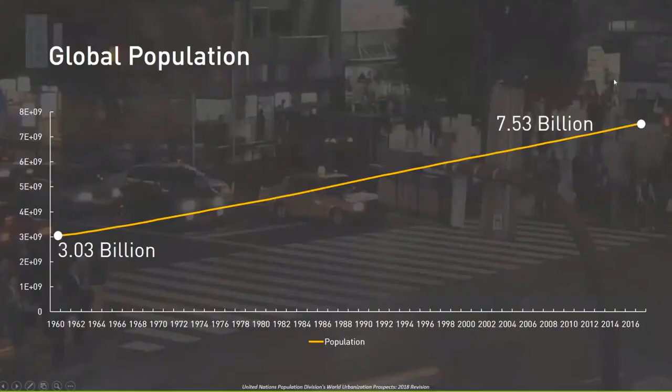Okay, so as we all know, there has been a drastic increase of population since the 1960s, right? So from 3 billion people to more than 7.5 billion people. So what looks like here a linear increase is actually very exponential when you go further back in time. So over the last 57 years, the global population has grown by 4.5 billion people.

To put this in perspective, I chose Shanghai as an example. Every year, the world is growing by approximately 86 million people per year, and the largest, Shanghai, has a population of 24.3 million. So this means approximately 3.5 times the largest city of Shanghai is growing per year in terms of inhabitants over the world. And of course, Shanghai is a very, very large city. If I did this talk in Europe again, it was, I think, 5 times the Netherlands. So if you compare it to countries, it's even more impressive than comparing to a city. But as I'm participating here now in your workshop, I thought Shanghai would be a nice example.

So in the early 2000s, there was more urban population than rural population... actually, in 2007, the urban population surpassed the rural population. So what does that mean? In developed countries, over 90% of the population lives in cities. And this, of course, has some sort of effect on cities, but how exactly? One good example, or very prominent example, is the urban sprawl of Phoenix, in Arizona, in the United States of America.

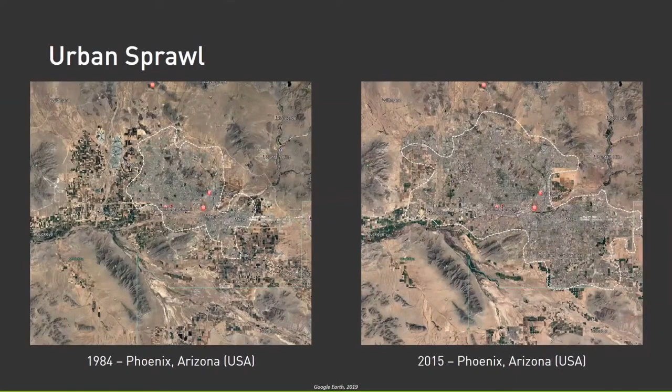So the boundary of the city has grown over the last 30 years by a huge amount, as you can see in the white dotted line. This means more area is needed, and the city becomes even denser.

This also means there's a clash of different social classes with different housing standards, so you as architects and engineers have to accommodate for that and address these social differences.

According to the United Nations Global Status Report, one major challenge will be to provide building floor area in the construction industry. This means basically we have to build more floor area.

This existing building floor area needs to almost double in the next 30 years. Before that, we thought we'd go again through the project briefing for new buildings, where the floor area is not only limited to Asia and Africa, but also Europe and North America, which we would like to guide you through until Friday.

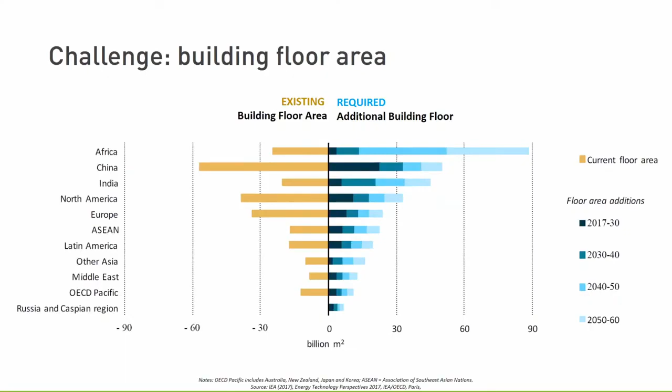This translates to an area of 255 by 255 meters, or 9 soccer fields. But before that, I guess we can go through a bit of the current challenge in general.

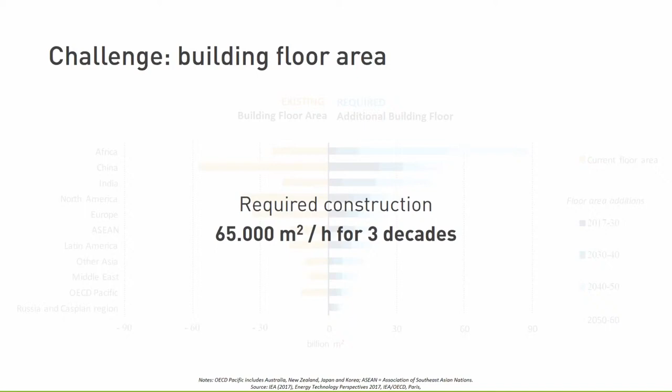Maybe a bit of a repetition of what we already discussed, but I think it's really important to get that building floor area, and also to other certain consequences.

We as the building industry consume a fair share of the global energy. The building and construction sector consumes more than 35% of global final energy. From an ecological perspective, this energy consumption also means more CO2 emissions.

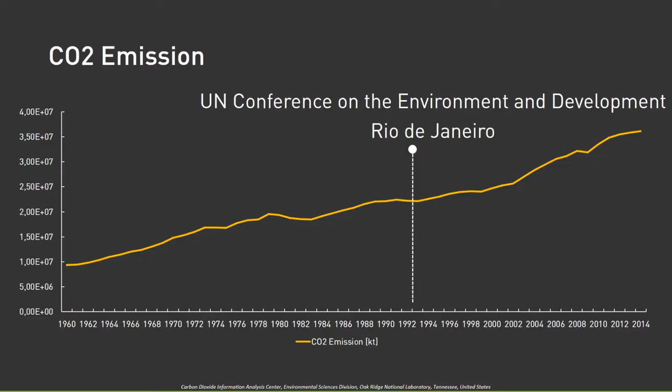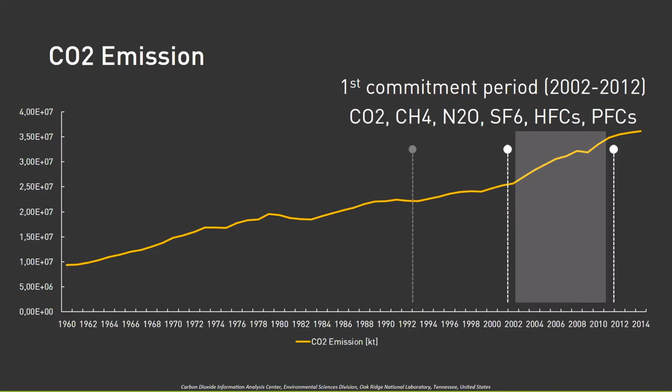The problem or challenge that we address in this workshop is the limitations of timber construction at the current moment. This is not to say that current developments in timber construction aren't super exciting, it becomes quite obvious they are very much advanced.

I think we saw in the last couple of presentations, and you're going to see even more in the upcoming presentations, that timber construction can easily be called one of the most digitally advanced construction sectors. But there's still a lot of things to tackle.

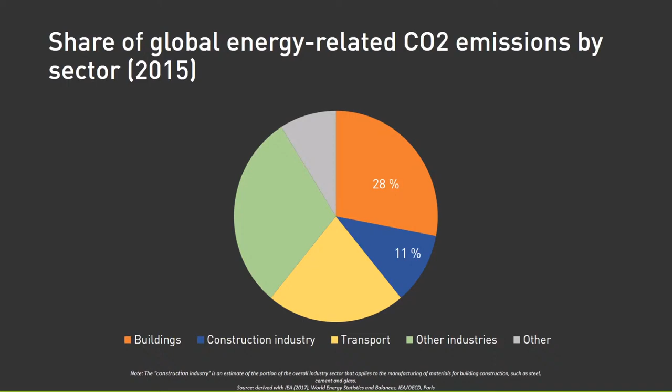One of the challenges, within the 40% of energy-related CO2 that we identified, is the limitations of the structural column to slab systems, which is mostly limited to very clear spans or short spans, and not really performative or materially efficient.

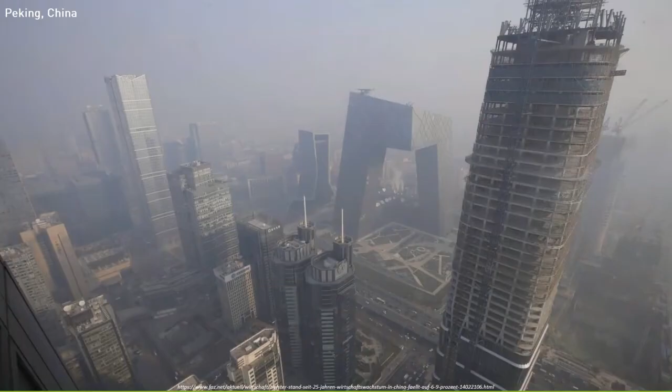So what could we do with that? We set the goal of this workshop to build more with less, through collective exploration of less energy consumption with all of you guys. But how is it possible?

We want to find new spatial, structural, and topological potentials within timber construction. Our hypothesis is that if you bring an on-site mobile robotic fabricator into the game, we can achieve multi-directional and monolithic timber slabs. The real question we try to answer is: how can these slabs look like?

And what can be achieved with timber construction given that technology. I guess we as workshop leaders have a couple of ideas about this, but it's way more exciting to get a lot of opinions and ideas into the playing ground, right? So I think this is the summary of what we're trying to achieve with you, and I hope this is also interesting for those of you in practice to see where timber construction could go in the next years. What is maybe already almost possible, and also staying on the edge of the field.

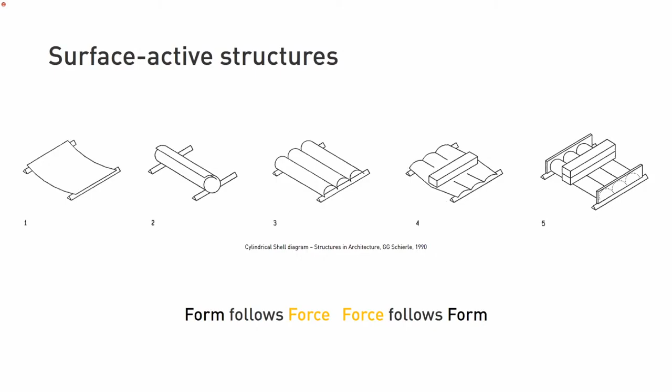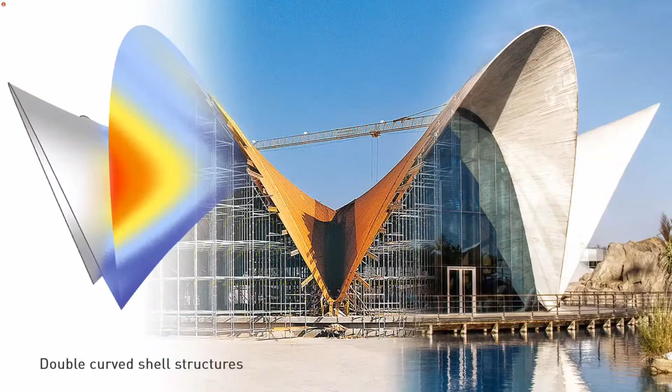Mostly in architecture, curved shells have been a powerful way to focus on tectonic articulation. This is similar to what we did on Saturday, but with the aspiration of making it more advanced in terms of really defining the position and arrangement of all the beams so that they make sense.

A variety of alternative strategies have been developed and are feasible to produce these double curved structures, using linear elements. You can discuss the aesthetic qualities or the structural qualities and so forth of the grid shell.

Then, by using planar elements, you have the area of fabrication, which you can see in the middle and on the right, where we already introduced you to the mobile fabrication agent. The one in the middle is the Exhibition Hall, which was done using that specific robot.

On Wednesday, if I'm not mistaken, we'll guide you through an integrative synthesis of approaches across all these areas, using discretization so that you can put everything together into one project integrating all these aspects, such as the Inside-Out Pavilion from 2019 by the team, and most notably the currently realized Swatch headquarters.

There are also other novel approaches to reduce extensive form work, with one example being the Nest HiLo from the Block Research Group in 2018. So multiple institutes and construction companies are trying to create surface-active structures with new methodologies and new approaches.

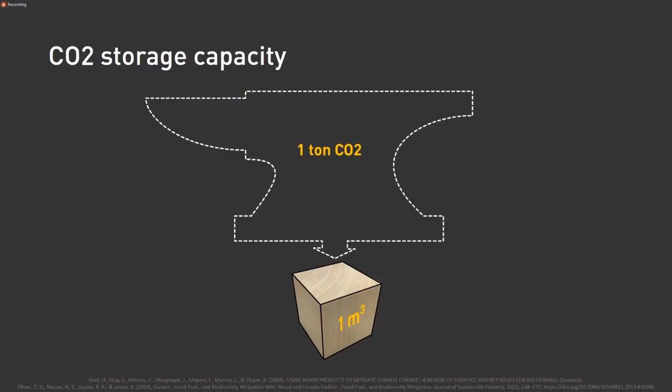Comparing to houses with the same level of energy efficiency, a wooden alternative causes approximately 40% less CO2 emissions, and the amount of atmospheric carbon stored in the timber can be up to 4 times as much as an alternative building material. This is one good reason why we're seeing more multi-story timber buildings emerging over the last few years.

I'm quite sure Jakob has shown this already, but I'll just briefly introduce some of them. These new multi-story timber buildings are reaching new heights.

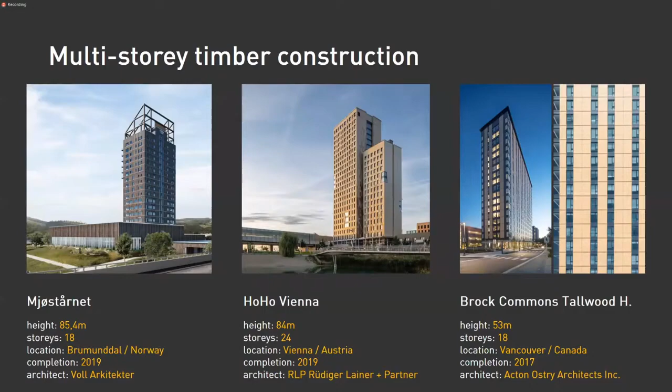For example, the Mjøstårnet in Norway, currently the tallest timber building in the world at 85.4 meters, though I hope this is still the current case—I'm not sure if there's already a higher multi-story building. This could only be the beginning, as further studies on multi-story timber construction aim for buildings up to 85 stories, reaching heights over 300 meters. There are already new projects in the pipeline trying to reach even larger heights. So there's a clear trend in timber construction to build higher, demonstrating how we have overcome many challenges facing timber architecture, while tackling the challenge of required building floor area over the next decades.

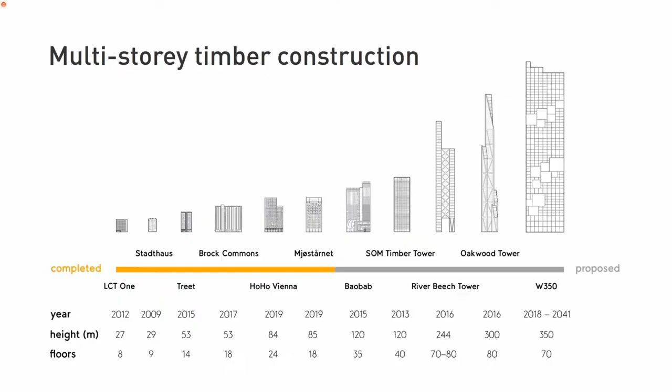This is why at the university we have the excellence cluster, which Jakob is also part of, called the Integrative Computational Design and Construction for Architecture. I'm quite sure he has talked about this already, so I'll skip ahead—but within that, we focus on multi-story timber buildings and long span structures.

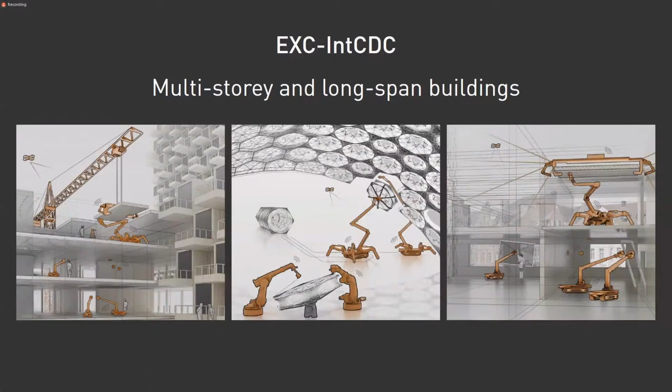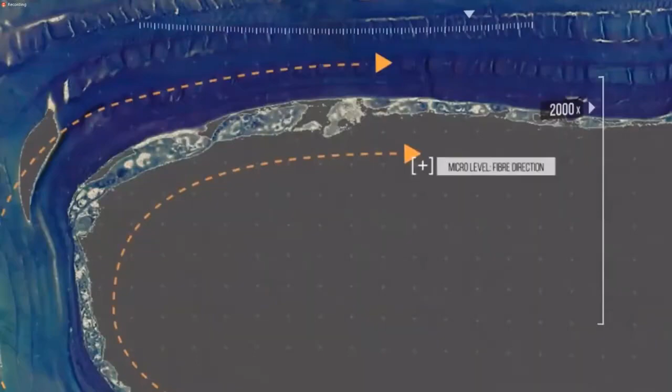At the Institute, we have investigated natural structures and tried to transfer these principles into architecture and engineering in order to build simple and resource-efficient lightweight structures. A few examples you can see here in this shortened video are from our research pavilion, developed over a few years, and we hope we can apply these methodologies and approaches also in the construction industry. If you want to check out these videos, you can find them online on the ICD homepage, and I think you may have seen these as well.

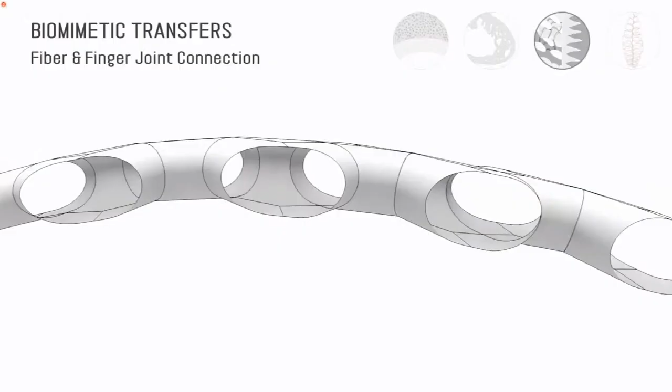So this is a brief overview of the buildings we have developed so far, always in collaboration with the ICD and also with other institutes at different universities around the world, mainly in Germany, as well as with biologists from the University of Tübingen.

Two of the latest projects I'd like to present now are the Buga Wood Pavilion, which you can see at the very bottom of the screen, and the Urbach Tower, both from 2019.

The Buga Wood Pavilion is a biomimetic pavilion realized for this year's Federal Gardening Exhibition in Heilbronn, Germany. The Buga gardening show was located in the city of Heilbronn in the south of Germany. It was open to the public for the last six months and closed at the end of October 2019—so this was already last year, though it feels like yesterday sometimes.

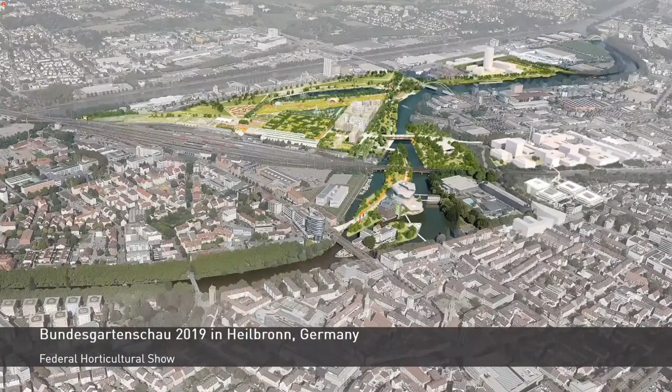The ICD and our institute were given the opportunity to realize two biomimetic pavilions on the Buga campus. Both pavilions are located on the summer island. On the right you can see the fiber pavilion, and on the left the wood pavilion, which I will now present a little further.

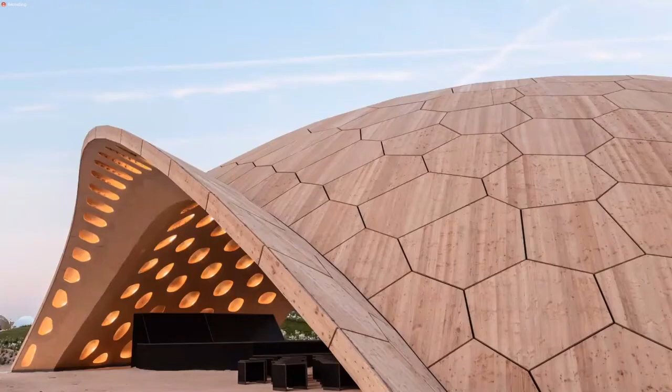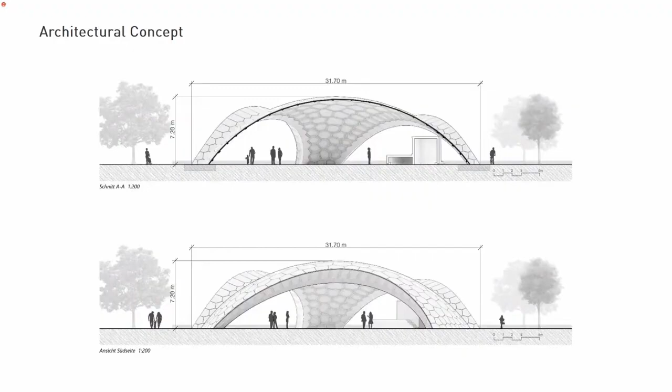The Buga Wood Pavilion serves as one of the main event and concert venues at Buga 2019. As mentioned, this was a collaborative team effort of the two institutes, along with various industry partners and sponsors. The structure is a segmented timber shell made from 376 wooden cassette elements, reaching a span over 30 meters. The tripod shell consists of an ellipsoidal global geometry with a rise of 7.2 meters, featuring arch-like openings with raised edges along those arches.

The first major segmented timber shell realized in that sense is the Landesgartenschau exhibition hall from 2014 in Schwäbisch Gmünd, Germany. It is a single-layer segmented timber shell made from 243 geometrically differentiated beech plywood plates, connected by finger joints and cross-threaded screws. Both of these wood shells are based on biological principles found in the plate skeletons of sea urchins, which have been studied by our institutes for almost a decade. The research focuses on the topology of segmentation and plate arrangement in relation to the finger joint-like connections.

In the course of the Buga Wood Pavilion, which we finished last year, we asked ourselves: how can we increase the structural performance, and what spans could potentially be achieved? Further, how could we increase structural performance without using significantly more material? Going back to our talk—we have to build for more, achieving large spans, but try to build with less.

The solution was developing a lightweight construction system that allowed us to triple the span of the Landesgartenschau exhibition hall while using the same amount of wood material per square meter of shell area. The Buga Wood Pavilion builds on the biomimetic principle of using less material by having more form, both at the level of the overall shell and at the level of its individual segments. As you can see, we almost tripled the span with approximately the same amount of weight or material.

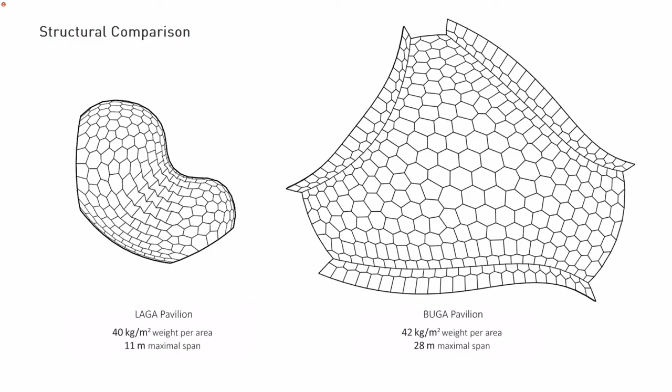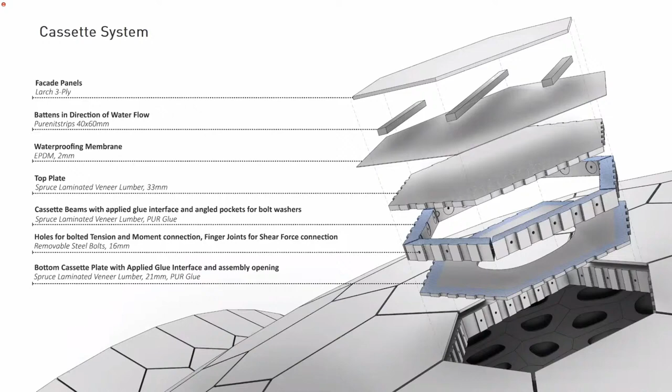This developed construction system is a hollow cassette system, which enables us to build with minimal material consumption and weight. The cassettes have a structural depth of 16 centimeters and are all planar. The hollow cassette system is built up from 2 thin plates that plank a ring of edge beams on top and bottom, forming large-scale hollow wooden cases with polygonal forms.

Both plates and beams are made from laminated veneer lumber from Kerto-Q, exactly. I hope I'm not repeating Jakob—I didn't follow the earlier workshop session, so I'm sorry if I do.

The cassettes are joined using 2 different connection techniques. The majority of seams are joined using a bolted connection, mainly in the convex areas, which allows for easy and robust assembly and disassembly, as you can see on the top right in the section. On the kinks along the 3 arch-like openings, a screw connection is used, as the bolted connection was hardly applicable due to the steep angle between adjacent segments, shown on the bottom right. For these openings we used a crossing screw because the bolted connection was just not possible.

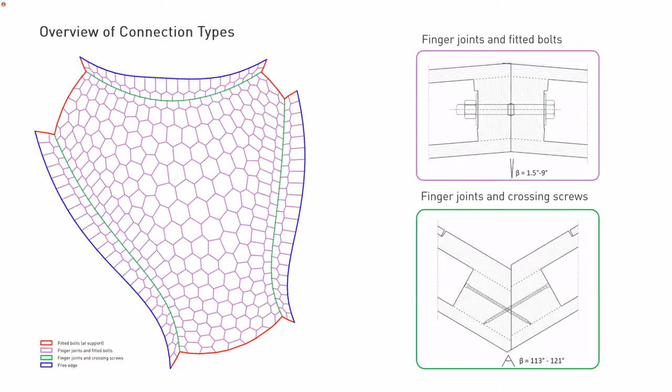All cassette elements are additionally connected by finger joints, which allow for the transfer of in-plane shear forces. The bottom plate also includes a large opening, which constitutes a distinctive architectural feature but also provides access to the hidden connection during assembly.

This Buga Pavilion was conceived under the paradigm of co-design, a framework that explores the interrelationship of design, engineering, and fabrication through continuous computational feedback within an interdisciplinary team.

As this Buga shell is quite complex, the geometry and the associated fabrication process impose all sorts of constraints, which permanently need to be checked during all design phases. The planarity of segments, edge length, and so on have to be checked during designing, construction, and engineering all the time.

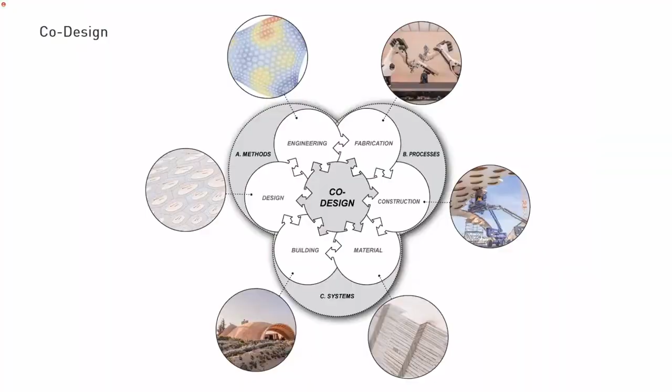This led to a global building information model done by the ICD, which carries all this information and allows it to be easily output for fabrication—meaning there is a parametric geometric model which contains all the geometry, finger joints, bolt holes, etc.

This informed model processes the necessary information for structural analysis by automatically deriving a structural analysis model from it and evaluating the results all within the same environment. The shell was investigated by calculating numerous structural iterations, resulting in one final geometry. This structural optimization process led to a shell structure which only deforms by 13 millimeters under the given loads.

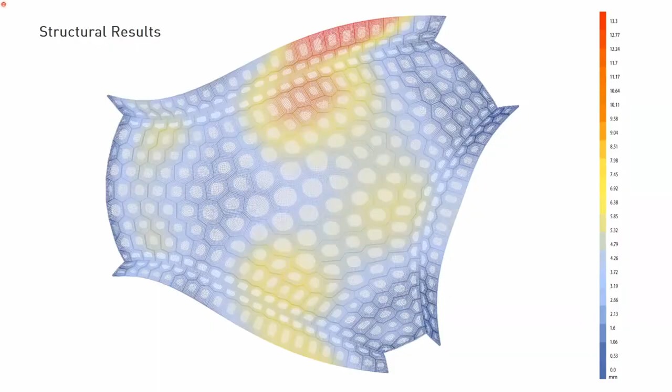Very briefly, I'm also going to show the fabrication process, which Jakob did a wonderful job on. I'm still astonished by how smooth this went.

The fabrication process of the building components uses a novel transportable 14-axis robotic timber manufacturing platform, which was developed by the ICD and partner companies.

The hollow cassettes were assembled by two collaborating robots, but I think I'm going to skip this part because I'm sure Jakob has already shown you this and can explain it much better than I can.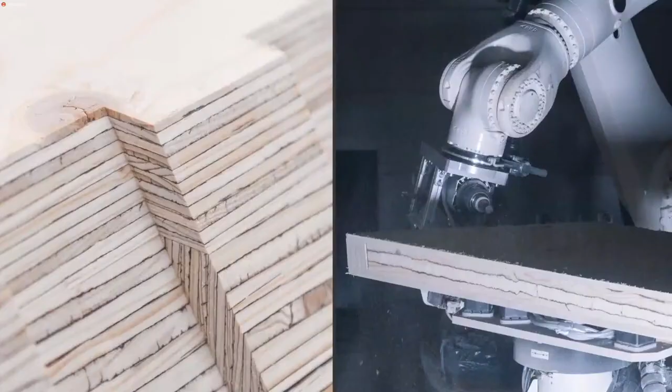First, these cassettes had to be assembled, and in the second step, over 17,000 different finger joints are machined into the segments with sub-millimeter accuracy. On average, the assembly time per segment was approximately 8 minutes, while the high precision milling takes another 20 to 40 minutes.

All 376 shell components were prefabricated in the factory. The 3 large opening arches of the shell were pre-assembled in the factory and brought on site in 6 pieces.

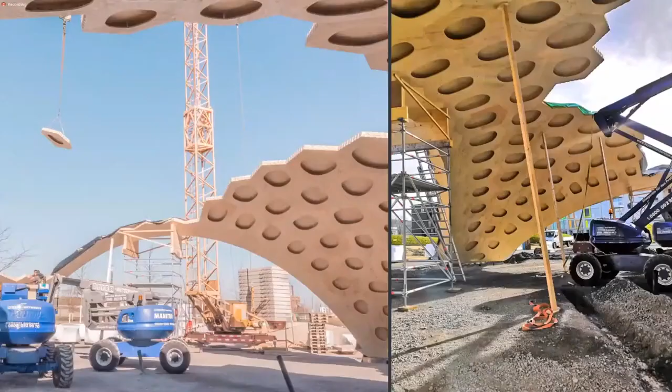The arch was supported on the foundation and a temporary support in the middle, and assembly then started from all 3 sides. The prefabricated shell elements were assembled in only 10 working days by a team of 2 craftsmen, without the use of the extensive scaffolding or formwork usually required for such shells.

We had some struts to locally support the structure, and the components were lifted in by a normal crane.

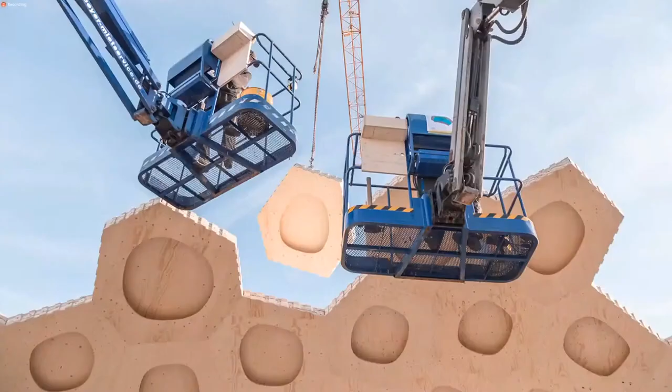The installation of the individual cassettes was done from the top due to the assembly direction of the finger joints, following a predefined assembly sequence which we also had to check back structurally. We calculated the individual assembly steps just to make sure that we had enough struts to locally support the structure and that everything would go smoothly.

Here you can see a worker assembling the bolts. Once the components are placed, the bolts can then be connected through these holes. And yeah, the shell was almost done.

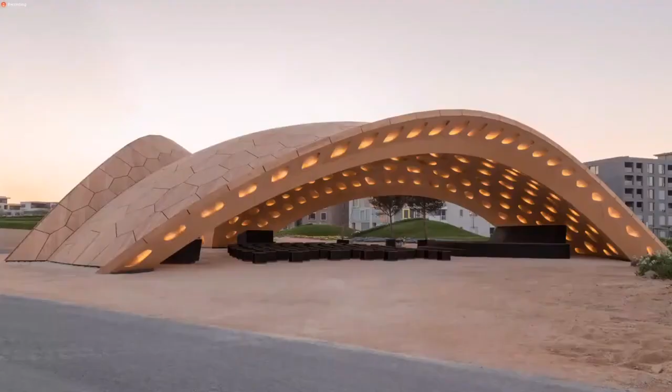So after connecting all the segments with these removable bolts, a layer of EPDM foil was applied to waterproof the shell. An untreated larch facade plate or cladding was added at the end, so the shell can be disassembled and reassembled somewhere else again, so it can be reused.

This was also something that we included in the design phase, and was actually given by the Bundesgartenschau requirement that the shell has to be able to be reassembled somewhere else.

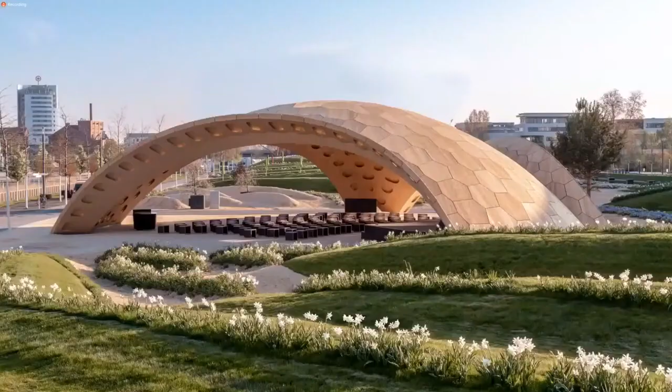So the pavilion achieves a column-free span of close to 30 meters while weighing approximately 40 kilograms per square meter. It showcases the possibility for efficient, economical, ecological, and expressive wood architecture. For the Buga 2019 gardening show, it actually serves as the main event location at the Buga campus, hosting concerts, talks, and so on.

Okay, I got some messages here. I don't know if you can see them. Hope they don't disturb.

Also, which was a quite nice feature, was the warm and subtle embedment of lighting in the openings, which at night gave a nice ambience to the shell.

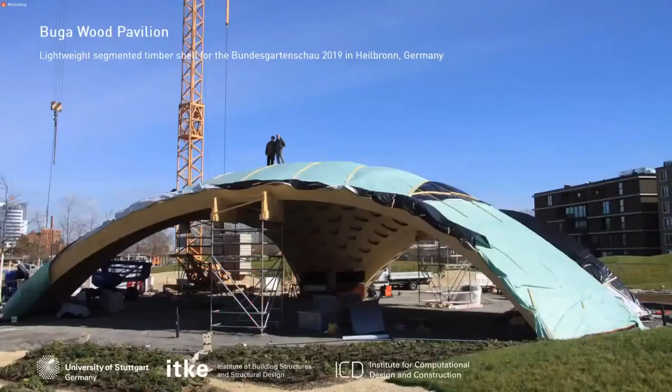And here's some impressions. Of course, every engineer or architect, once he or she builds a shell, has to get up there. I think Jakob took a few pictures like this too. We were quite excited during that time. So this is me and my colleague Daniel Sonntag, also from ITKE, on top of the shell, almost finished, just to check if it actually holds up.

All right, so this was the Buga Wood Pavilion. I hope it was not too repetitive, since Jakob was involved in the project as well, I'm sure he also showed some of the images. If you have structural questions, you can ask me. If not, I'm just going to show the next and final project, which is the Urbach Tower.

I also have a model here. I don't know if you've seen this before. It's this very artsy landmark made from curved cross-laminated timber, also done for a gardening show. In Germany, we have a lot of gardening shows, also in 2019.

The Remstal Gardening Show, or Remstal Garden Show, is a smaller horticultural gardening show located in the Rems Valley in the south of Germany, very close by to Stuttgart, where we work and live. The ICD and our institutes were part of the winners of a national competition, and were given the opportunity to build one of 16 architectural landmarks along this Rems River.

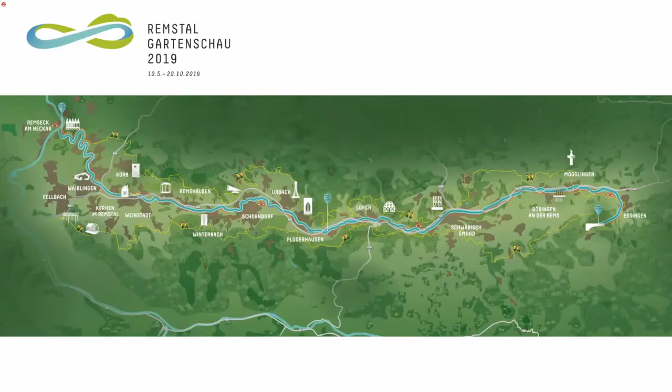Here in the center, you can see Urbach with the tower, and there were 15 other stations accompanying our station, or just in the next village, there was another landmark by other architects and engineers.

So the Urbach Tower, again like the Buga Wood Pavilion, is a collaborative team effort of the two institutes, and also, of course, along with other industry partners such as Blumer Lehmann, but also with other institutes like ETH Zurich, and so on, as you can see here.

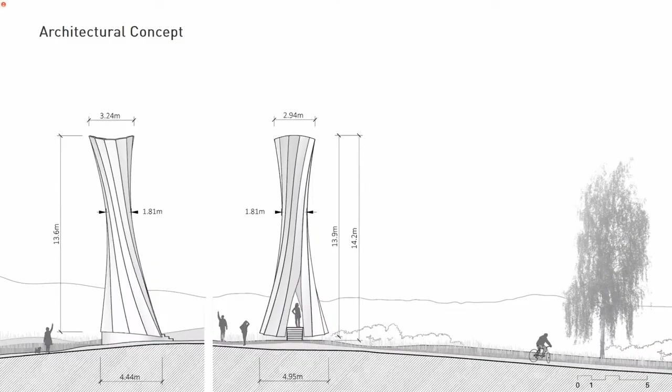The tower is a surface active timber structure made from 12 curved CLT components, which are made from hygroscopically self-shaping wood parts, or hygroscopically self-shaping timber. The tower is 14 meters high, and serves as a building demonstrator, landmark, and shelter for hikers.

The design of such a complex structure necessitates an integrative design approach that incorporates formal, structural, and fabrication design into one framework. Here you can see the clear interdependencies of different levels of hierarchy, such as material design, connection details, and component design. This allows for constant and continuous computational feedback within our interdisciplinary team.

The material design is based on a novel self-shaping process developed at the ICD and the EMPA of ETH Zurich that enables an adaptable production of higher curvature CLT parts with less machinery and reduced formwork. This shape change is actually only driven by the wood's characteristic shrinking during a decrease of moisture content. The Urbach Tower utilizes this powerful, naturally occurring deformation to trigger this self-shaping behavior.

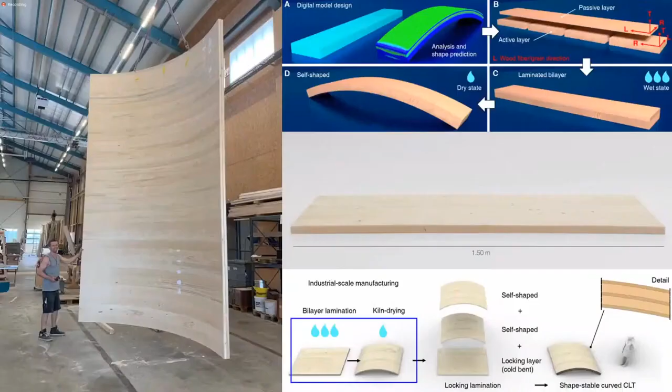So it forms only by drying. I think the video explains it much better now. One active layer and one passive layer are designed and manufactured in a flat state to form one bilayer component. This bilayer transforms autonomously into the final predicted curved shape during the industry standard technical drying process. Multiple of these bilayers are then subsequently laminated and locked into the bent shape by a cold bent locking layer to form large curved CLT components.

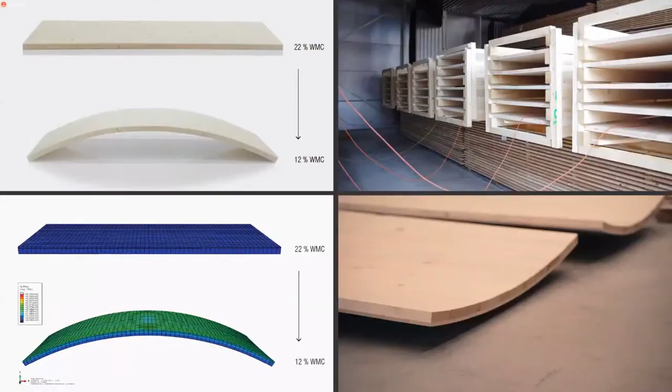Each fabrication is simulated and tested in close cooperation with our industry partners to figure out what range of curvature is producible in an efficient and economic way within a standardized industrial manufacturing process. We further investigated what curvature range is actually required and what impact the curvature has on structural behavior. The higher the curvature, the less deformation and therefore the better the structural behavior.

Architecturally, this results in the very distinctive form of the tower, which constitutes a truly contemporary architectural expression of a traditional building material, wood, celebrating its innate and natural characteristics.

The geometric model of the tower is actually quite simple, despite the appearance of double curvature. The surface geometry is generated by arranging self-similar cylinders with center lines distributed on a top and a bottom circle, which you can see on the left. This cylinder is mainly rotated around the two circles and then intersected.

What is quite interesting is that these cylinders, used in the geometric design, could also simply be used for fabrication, as the components were nested on two half cylinders and on two half cylinder fabrication planks. So each curved component can then be 5-axis CNC cut from single curved fabrication planks without any surface milling process.

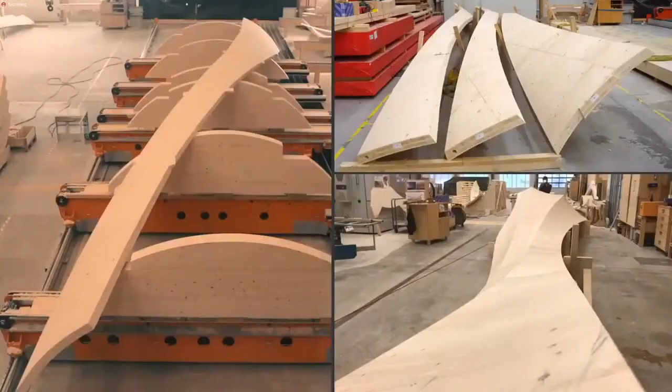The 12 CLT components were nested and cut from 15-meter long, 90-millimeter thick curved fabrication half-cylinder planks of custom CLT material buildups. The approximate CNC machining time was 90 minutes per component.

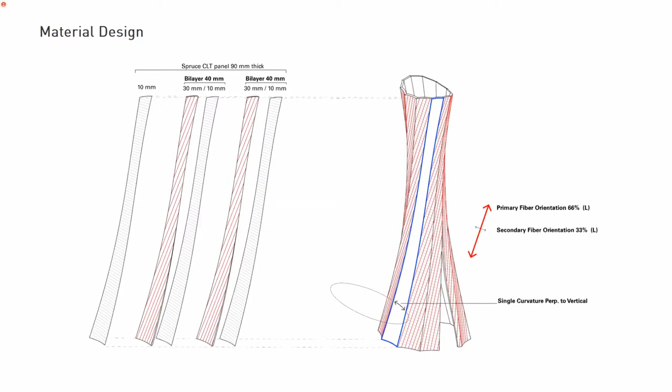Our design also made use of this integrative design process. The CLT material can be designed with a buildup that favors the primary vertical loading direction, so the material is optimally tailored for the structural force flow, which you can see here again. The fibers are aligned along the main force direction.

The tower components are connected by crosswise arranged full threaded screws.

So also compared to the Buga—oh, there's a question, I think. Or is it just— oh yeah, sorry, I didn't see that. Is this a question regarding the tower, Hani? It's about Buga. Okay, oh, sorry, I didn't. Sorry, I was— no, it's okay. So in this case, I want to know how you design. You can answer it after your lecture. Okay, I'll get back to it. Sorry, I didn't see it in time.

So here for the tower, we actually used again, as for the Buga, for the rings, crosswise arranged full threaded screws with different angles, as you can see here. For the tower, the angle constantly changes along this curved seam, so we had to check each seam if the screws are actually applicable for the connection.

The curved seams with varying angles between the components necessitated a parametric and adaptive joint implementation. The angle alpha, which you can see here on the left, varied continuously between a range of 126 to 146 degrees. To accommodate this range, the enclosed angle theta within one crossing screw, shown on the top right, had to change accordingly.

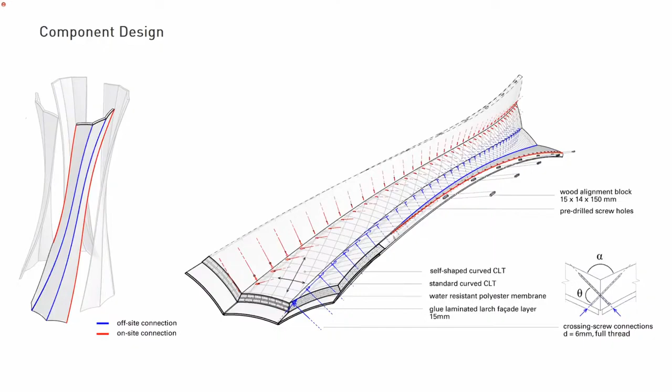So this was kind of the material design and the joint design, which then come together into component design, integrating the material and the joints, as well as fabrication and assembly constraints. Each component is connected to the next using simple alignment blocks, which you can see here on the right, and crossing screws where the holes were pre-drilled in the factory. As I mentioned before, three components were assembled into one assembly group, resulting in these offsite and onsite connections.

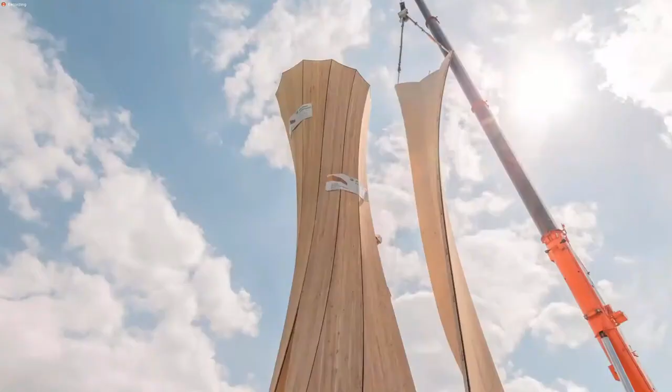With a total weight of 4 tons, the 4 prefabricated assembly groups of the tower could be loaded onto 2 trucks and transported on site. They were prefabricated at Blumer Lehmann in Switzerland, then driven to the site in Germany, to Urbach, where they were assembled in a single working day by a team of 4 craftsmen without the requirement of extensive scaffolding or formwork.

The tower's load-bearing structure exhibits a thickness of 90 millimeters, so 9 centimeters, while cantilevering over 14 meters. The total height of the tower is 14 meters, resulting in a span to thickness ratio of approximately 160 to 1.

The inherent curvature enables a highly slender and lightweight tower structure of only 38 kilograms per square meter surface area. The Buga was around 40, 42, and the tower was around the same value, so 38 kilograms per square meter.

When we assembled the tower, it looked quite wobbly. The individual parts, the assembly groups, seemed really thin in the air and were quite soft, I have to admit. But once the tower was assembled and completed, the entire structure was quite stiff, which was good for us as the engineers.

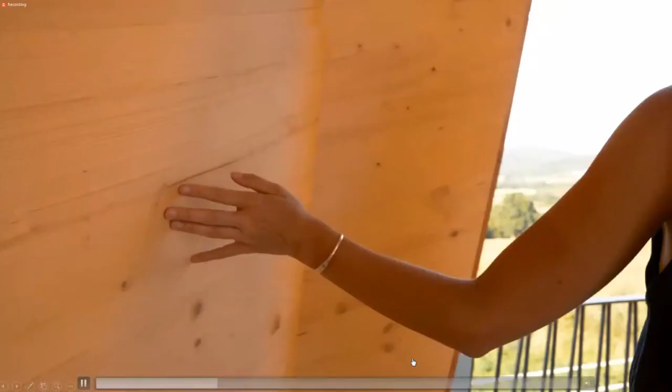Oh, so there's sound, I don't know if you can hear that. So these are some images, some short videos, but I think also longer videos have been published by now.

What's quite nice about this project is that it's not a real structure - it's more like a shelter for hikers, a landmark to see from afar and maybe go there and look at it. What was astonishing for me when I saw it in real life was that on the outside it had these really sharp edges, and on the inside it was quite soft in tectonics, and this video demonstrates this nicely.

To protect the tower from water and the environment, a custom-made protective cladding layer consisting of glue-laminated larch wood was added on the outside. Also, in order to provide shelter from rain, the tower structure was topped off by a transparent curved polycarbonate roof - a very thin, bent roof on top.

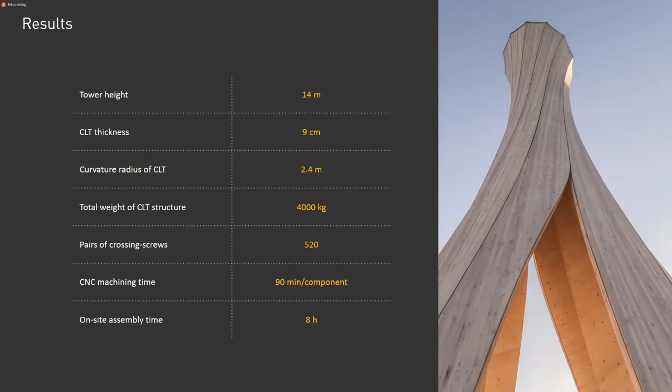Here are some of the results: the tower is 14 meters high, the CLT thickness was 9 centimeters, and so on. These are some impressions.

What's also quite fascinating is that a lot of local bikers and hikers actually go there and visit it, just to have a look. Some ask weird questions like, what's the use for this? When we were there, I always tried to answer these questions as nicely as possible - it's more like a landmark, not a real building, and you can't actually go up to the top because the budget didn't allow it. But currently we're planning one where you can also go all the way up to the top.

So this was the Urbach Tower. I hope I still have 1 or 2 minutes to finish up my presentation. As you're all aware, this is all basically research. What's quite nice is that we can actually also build stuff, because once you realize these projects, you become aware of everything else that is needed to actually realize them. So how can we transfer these research principles into practice?

So segmented shells could be used for long span roofs of structures that cover interior spaces, such as malls or airports. The example you see here is the competition entry for Expo 2020 in Dubai for the Baden-Württemberg house, where we won second prize. Unfortunately we didn't win, but second prize was also quite nice. This was our competition design: a segmented timber shell which serves as an enclosure for the multi-story functional building.

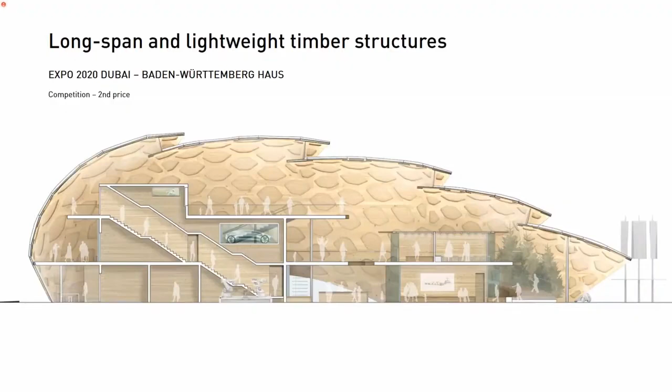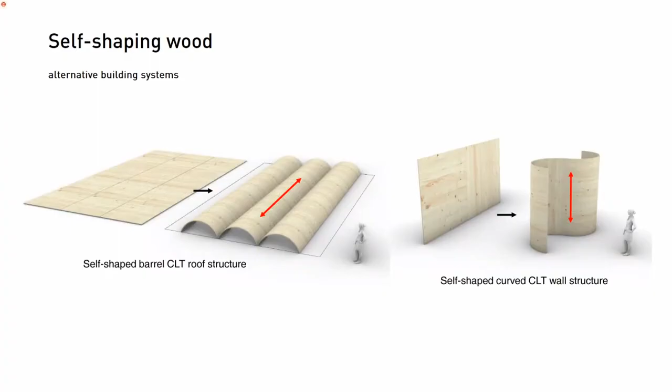It's kind of like the Candela shells you see, usually just a long span roof with some interior inside. For the self-shaping wood, we could think of alternative building systems that are as performative as state-of-the-art mechanically bent timber products, but manufactured in a more sustainable way. Such as a self-shaped bent CLT for roof structures, which you can see on the left, or maybe also for curved walls in buildings to provide more lateral stiffness, which can also be seen in some architectural projects already nowadays.

But I think our main focus at the Institute currently lies on performative building systems, as well as fabrication and assembly methods for multi-story timber buildings, because this is what we actually really need. So these projects I presented to you today are some sort of a niche. I mean, they're really nice, but of course they will not solve the problems I mentioned earlier in my talk.

So to conclude, what did we learn and what messages can be taken from my talk? First, we have to build more with less. We have to build sustainably, with the least material we can, maybe also integrate the most we can in our building components. Also, we need to rethink construction: build reusable, recyclable, and reconfigurable. And we as a construction industry need to extend integrative design and fabrication methods to construction, making building processes much more efficient. And also, in my opinion, we should build with more timber if possible.

Okay, so this was my talk. I hope you liked it. Oh, and there are much more questions now, I just saw, but maybe we can open up the discussion now.

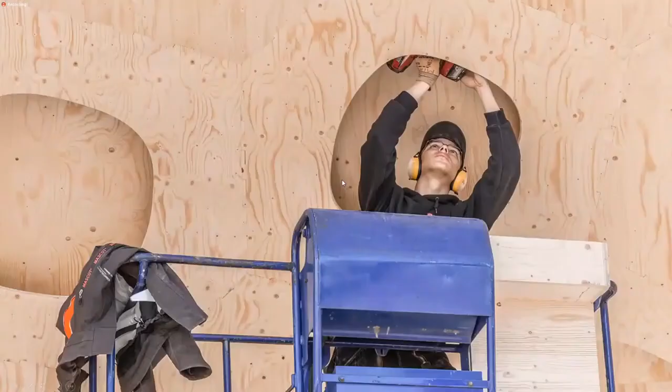No, sorry, you can see it here. I think there's this EPDM. We always protected during the assembly of the Buga project, or rather the company who assembled it, always protected the timber from getting wet, because it took a few days and it was raining during that time. So there's this EPDM, I don't know if there's a photo where you can see it, I'm sorry. No, it's okay, I can understand, okay, I got my answer.

So Mahmoud posted a question on the tower project: are all external surface curvatures simply trimmed from a cylinder surface? Yes, so this is what I showed here, let me explain this again.

So we designed with this cylinder, rotating around these two control circles on top and bottom, and then it was just a simple intersection and trimming of the surfaces, and these surfaces remain. So the tower components are only single curved, not double curved. They just seem like they're double curved, but they're only curved in this direction, so this is actually all a developable surface.

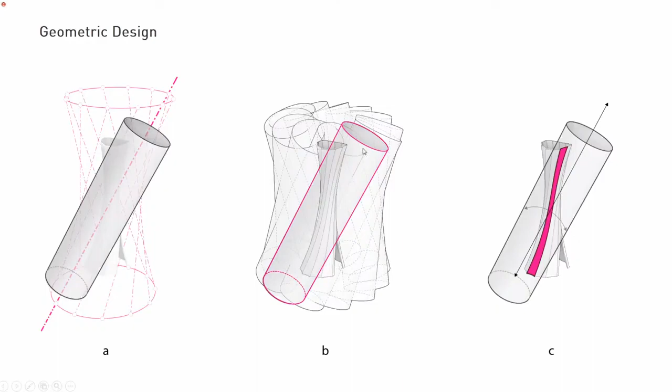Similar cylinders were then used for fabrication. We used these fabrication blanks and cut off the tower components from these cylinders. Here the cylinder is not there anymore, but we tried to nest as many components on one half cylinder blank as possible. They're only single curved, curved only in this direction, like this, and the rest is like the other.

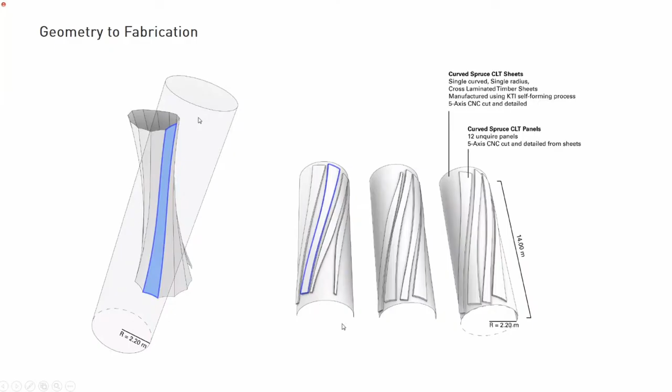Yeah, so it's a developable surface, right? And these are then the cutoffs. So here, the cylinder was lying on the left here on these kind of half cylinder walls, right? And where we cut off the component. So this is not the final component, but here on the right, you see the final component.

Okay, great. So the self-shaping technology was used to achieve a single curve shape at the end surface, right? Yeah, exactly. I think here you can see it quite well. So the pieces are actually smaller. It's not like this entire cylinder self-shapes into one large half cylinder. It's actually that you have these smaller parts, what you can see in the middle.

Can you see it? Is the video running? Yeah, so you have smaller parts. I think they were a little larger than this one, but I don't know the exact dimensions. It was something like a meter by, the length was quite long, but the width was a meter, and then we dried them in the kiln, and then they self-shaped, and afterwards they were added together, laminated again together.

So, but you were able to achieve the exact radii of the cylinder with self-shaping technology, right? I think it was within 5 to 8% accuracy in the end.

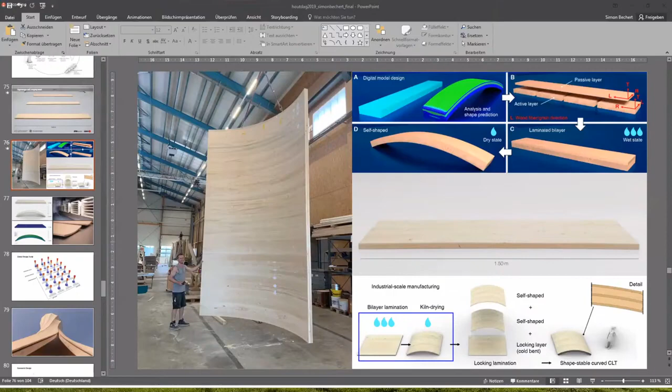Let me just show you quickly something where this is illustrated a little bit better. Wait, if you give me a second, I can show you. I hope I'm not overusing my time.

Do you see my mouse actually? Yes. Yeah, okay.

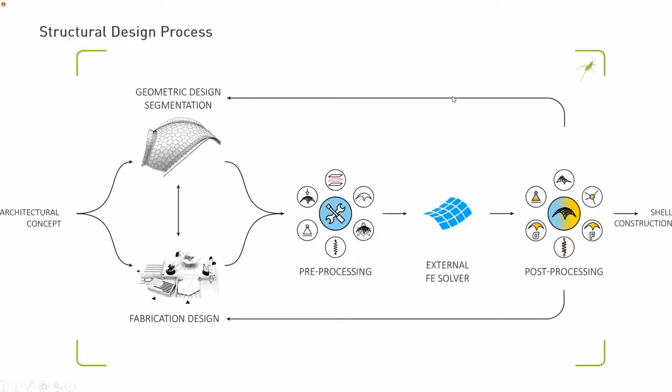The top shell elements had this compressive spring that only could work in compression, like if there was contact between - if you bent 2 components, there was contact within the 2 top plates, and the same for the bottom plate. For the bolt, we had a tensile spring and an in-plane and out-of-plane shear spring. So the bolt can actually take in-plane - if the 2 components want to deform like this, or they want to deform like this, you have some resistance.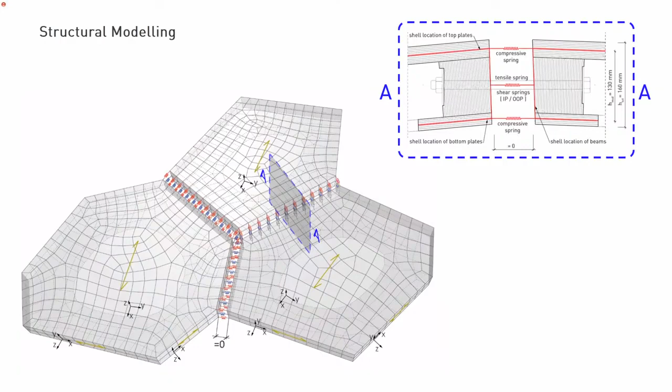Yeah, that's true. Once again, this work was not done by me, it was done by ETH and the ICD. But the way they did it, they did it in a volumetric FE model, so not what we mainly use for our global structures, but a more detailed analysis. I'm sure you're aware of this - I think they did it in Abaqus, and they simulated it where you have like a 22% wood moisture content, and then they let it dry in the simulation to 12% and see how it deforms.

This research, I think, probably it's better for you to get more insight if you read the paper. I can share it later, it's in Science Advances, where they explain it quite elaborately. But that's how I know it was done - they simulated this and then also tested it with physical prototypes. I'm not sure if it's actually done in a parametric environment. It probably could be, or it could also be parametric in Abaqus. Did I answer this question?

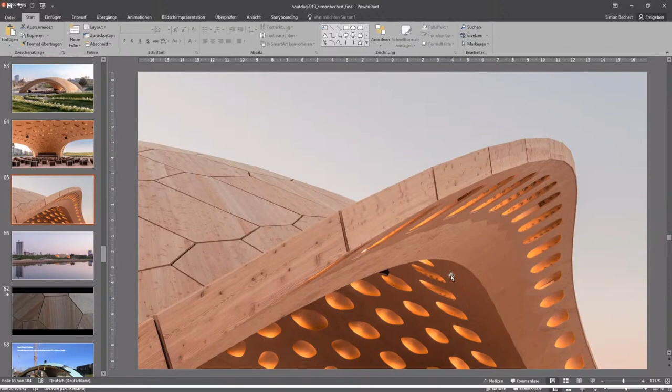Or is it because it's not like a perfect arch? Maybe it is that, so this is a design intent actually. This is what Thanos meant. We did some form finding on the shell, but it's not a purely form found geometry. It is a trade-off between architectural design intent and structural optimization, structural form finding. So it's something in between.

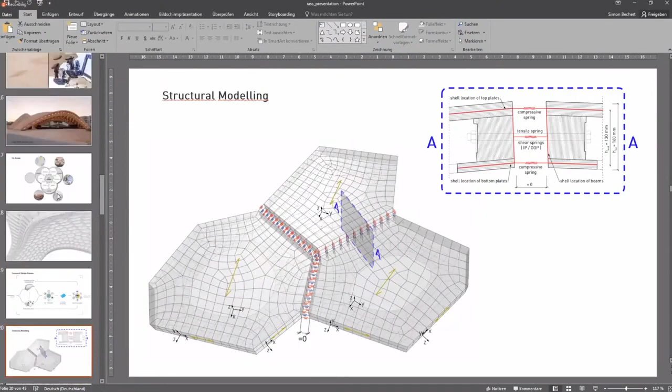We did many iterations where we tested different parameters, like the wing angle, the S-curve, which was also one very significant design feature of the shell. We tested different geometries, analyzed them structurally, once on a continuous monolithic shell, and once on a segmented shell. We checked how good they perform, and where there could be a trade-off between architectural design intent and structural optimization. So it is not a purely form found geometry - we didn't want that, we wanted to be somewhat expressive also in a way. So it was this kind of trade-off, and that's why it actually has this wavy shape. It's intended to have these arches, or that the arches have this shape.

And Sadra, thank you for the presentation. Yeah, you're welcome, of course.

First question is, how can we control the amount of curvature of the timber by self-shaping? Is it the amount of moisture?

Yeah, I'm also not the expert here, sorry for that. It is about the amount of moisture, and also about, I think, the thickness of material and how they are aligned. If you align them perpendicular to one another, you can achieve more curvature. If you align the fiber orientations differently, you will achieve other curvatures. In my talks with my colleagues, I know that you can control this quite accurately now, or they can at least. You can reach actually quite some differences in curvature, and it is due to the moisture content. If you don't dry it as much, it will end up with a different curvature.

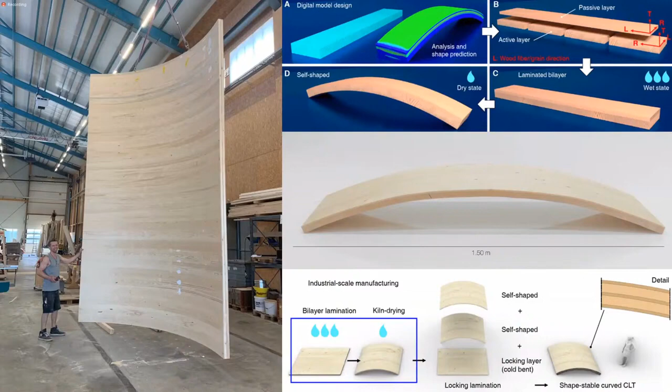Yeah, I think we have another question with a similar topic, also asking to show and explain the foundation of both projects. Okay, so for the tower, I can show it in the model, or I think there was one slide where we have more detail.

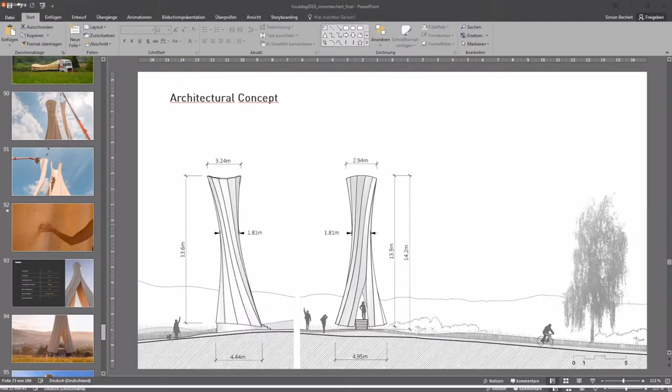No, it's not here, wait, let me open up another presentation. Sorry. So for the IASS, same as in Barcelona, like for the Buga, I also did one presentation for the tower, and the one I presented today was kind of a mix of the two, as you can figure.

And I think I have - you'll see very similar slides here when I'm looking. Is it here? Ah yeah, okay, so this one. This is kind of an overview of the tower design. So that's what I mean for the foundation - you can see it's kind of this concrete foundation.

This was also an architectural design intent to have the tower elevated. It also helped for rainwater to be drained off properly, but it also meant we had to put in additional effort for these steel brackets. If you look at my mouse, you can see the tower was actually standing on these steel brackets, and the steel brackets were hanging onto the foundation. This was due to a lot of decisions during the project.

Because at the very beginning we had a different site where the tower was supposed to be erected, but this changed, and for this new site we wanted it to be a little elevated. So we decided as a design intent to have it on a concrete foundation. Sorry, my voice is... on this concrete foundation. For that, we also did some checks.

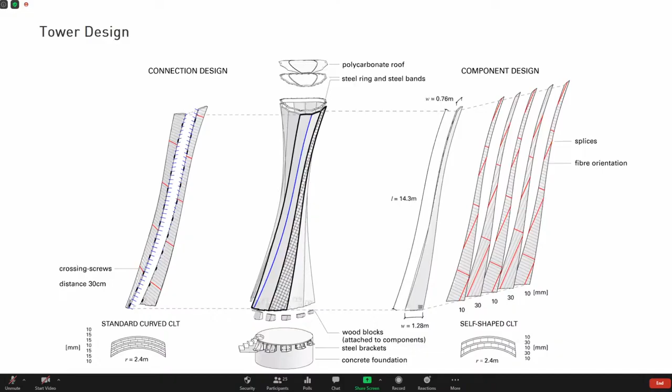This is pretty straightforward - we didn't have the foundation in the structural model per se, we had it in the geometrical model but it was done as an additional step. So what we did, we took the resulting support forces and applied them in another analysis onto the foundations, just to simplify the model, because you could have done it all in one model, but sometimes it's better to have separate models that are simpler and cleaner than trying to implement everything into one.

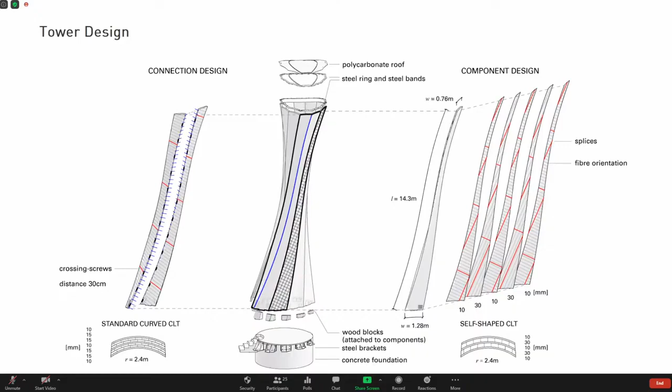It is nicer to only have one model, of course, but you have to make sure that everything is properly connected, properly simulated, and this makes it sometimes a little more difficult, not so straightforward, and also computationally heavy. So that's how we did it for the tower.

And for the Buga, there were also three large supports, and there were also some linear concrete supports, and the cassettes. I don't know if let me see if I find a picture real quick, an image where you can see that.

Okay, this - yeah, this is a little... it's not the best picture. Ah yeah, this is one. So this is how it was done.

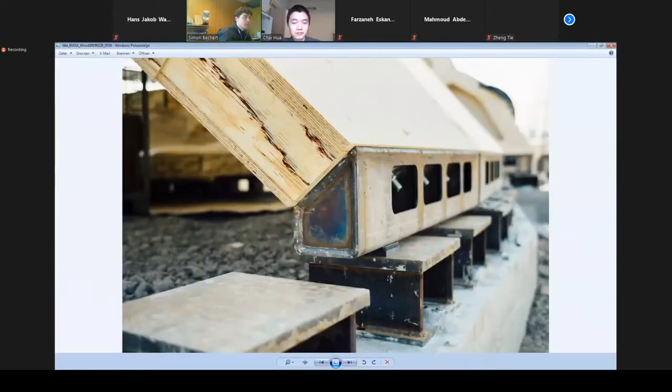So we had these steel brackets that were also part of the geometric model, where we used the same connection to connect to the wood components, by a bolted connection. So this is how it was done. And then these steel brackets or these steel parts, they were then welded to an embedded steel part that was connected to concrete.

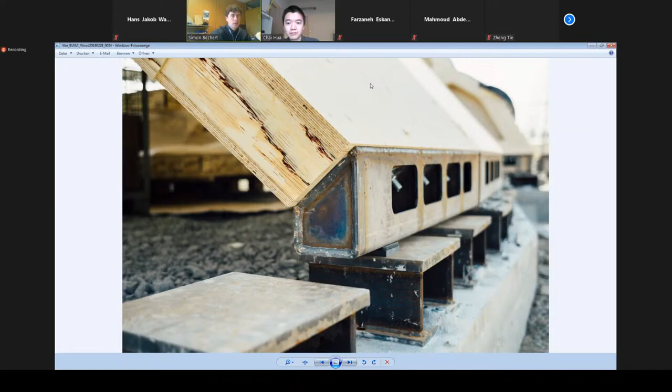Here it was quite difficult because we worked with a different engineering company that took care of the calculations for the foundations. They proposed some solutions, and we had a long discussion, but we ended up with something like this. These parts were around 30 individual components, but we had a parametric model where we could change them quickly and extract all the plans to produce them.

So if the global design of the shell changed, we could directly change these parts too, which was quite helpful. That's how it was supported. On the bottom you just have a normal concrete support, and some drainage for the water, because the water runs off here. I hope this answered your question.

We have a last question. Amazing projects, thank you for showing us the Urbach Tower. What happened to the material remaining from the cylinder cuts? Has it been reused somehow in the project or somewhere else?

Unfortunately not, this was really cut off. This is something for the future which could be changed or improved. In timber construction you always have cutoffs, that's just normal and not avoidable, I'd say. But it was not used.

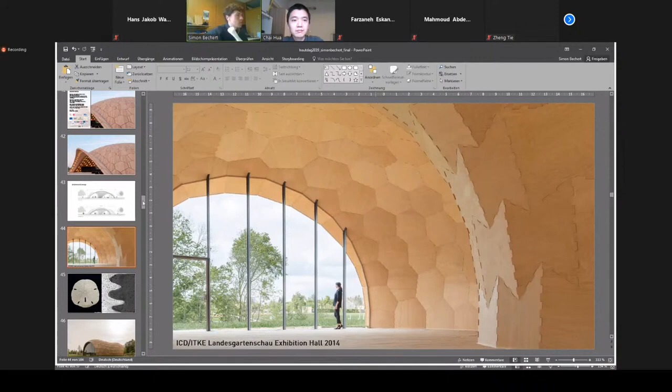But I have to say this tower is very special in that sense - not unique, but special - so it's not really comparable. What I proposed later, if you just use these kinds of barrels for the roof, then you don't really have any cutoffs. The components for towers were quite special, so it's quite straightforward that you have some cutoff. But if you did a roof like this barrel roof structure, you could use the material much more efficiently, I would say.

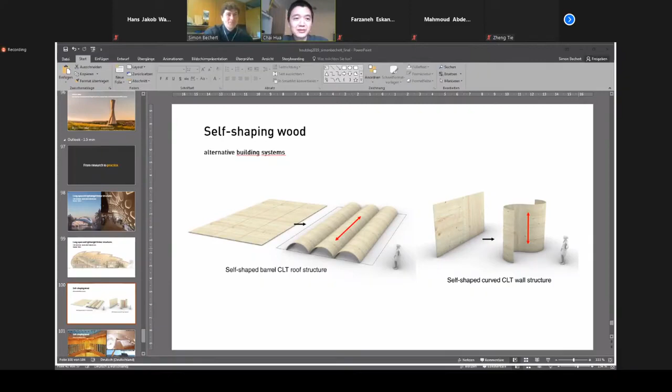Maybe we'll thank Simon again, and we will have a break, and meet you all in 20 minutes? Half an hour? Okay, so half an hour, it will be 10, 11... I don't know, how to say. Yeah, so we'll have the break and meet you later. Okay, you're welcome, thank you. Bye, bye.